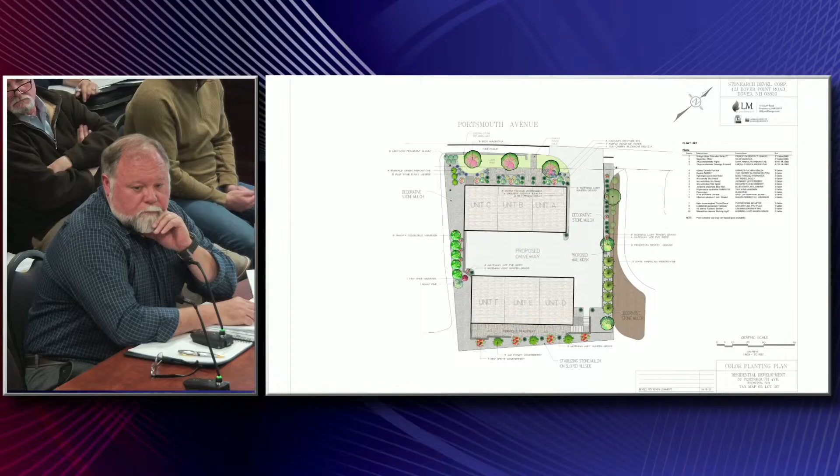There is a door, or at least in the rendering, a door is shown adjacent to that end of the parking stall, near the utility area. So if there's a car parked there, that door becomes unusable to exit from. Does it open in or out? I would assume they open in, most entry doors do. No, they wouldn't open out, because if there's a fire, you need to push a door to go out. The little square feature at the southmost point of the building is the utility room, but the little bump out right beside the steps, yes, that probably does open out, though no one should be coming out of it.

One wouldn't assume so, unless it's during the day and someone's around. So the stairs go around that. I see, yep.

Well, if there's 2 cars parked there, the person who parks the second car, I would assume, is going to leave room for the person to get in or out of their first car. So there should be pedestrian space to walk between the vehicles. I mean, I would assume there's enough space for two vehicles and people to go. And if there's not, they're gonna walk around them and through the hedges. That's just reality, right?

I'd agree there should be enough room to walk, but I'd still like clarification on the door opening out or in. If it opens out, it's a problem, because there's gonna be a car there. Are we looking at the same one? I'm looking at Unit D, the second rendering, page 3 or 4. There's about a 4 foot walkway in front before the parking stall starts.

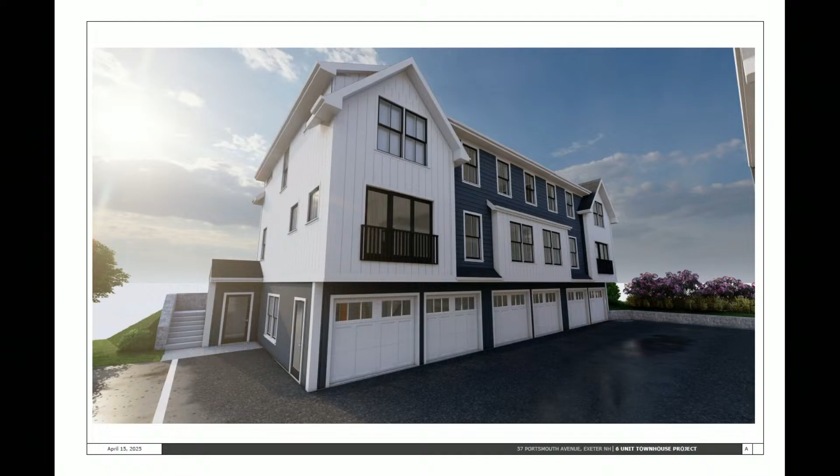Which I don't think is typical, is that? Well, you'll notice all of the other doors, the entry doors to the house, swing in. Yeah, that's my mistake if it does show it opening out. It does, okay, it does show it, I'm looking at it.

It might depend on what's in the room, which you might not be able to open it. The garage, that's where a car could be in the way. Yeah, but if it opens out and there's a car there. Well, yeah, that's not good. The car in the garage could be in the way too. It could be both ways. But they control that, so to me that's different. That door doesn't go into the garage.

Yeah, it does, this little one here goes into the garage. What's the furthest garage door? Wait a minute, what are you looking at? The left-hand side next to the stairs is just the utility. Yeah, does that go into the garage? Does not, that's not what I'm talking about, John. I'm talking about the one that goes into the garage in the corner.

Oh, yeah, that's the only one that matters. The utility one to me is irrelevant, but the one where the car is gonna be parked is the one I think we're talking about. Yeah, I mean, I would just say in, right? Because that way, if it's in the way of their car, it's their car.

And they can always hit their garage door button, exactly, and lock the yawning chasm of that opening. Better to catch it now than a year into someone owning it and being frustrated, right? Absolutely.

So all three garages are open to one another? Or does he? Oh no, I'm talking about just the garage door to get your vehicle in, the door up front that we just talked about. Yeah, well I was talking about the back one. That door, we decided, opens in. This door is depicted currently to open out, that's going to be corrected to open in. What I'm asking is, are those three garages attached, is that one big open space? So one guy gets a door in, the others don't?

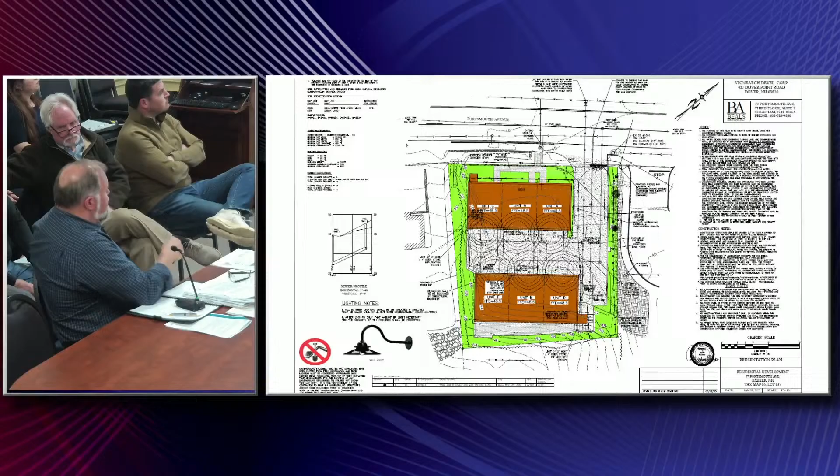So we have this entire area of paved patio, or paver patios. Those are going to be pervious, they do have the filtration below them, they've got the stone reservoir below them, which you can see if you look at the cross-section. Then, of course, which we don't even model in the stormwater plan, these proposed areas are the identical thing, they're going to be pervious as well, so they will take some stormwater from that. But this entire roof, the back end will fall directly into the paver area, and the front will be guttered down and into the stone reservoir, as is pretty typical.

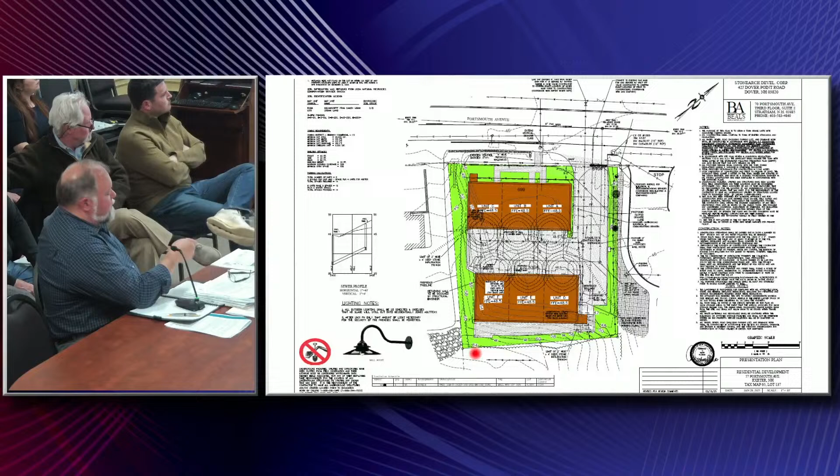Now, the landscape architect is proposing stone mulch for a good deal of the area outside the building, and obviously that stone mulch is going to capture and infiltrate water. But again, we try to run these stormwater models so they are as conservative as possible and basically just contemplate our design BMPs. So that's going to capture an awful lot of water, which is not even accounted for in the stormwater model, because those are absolutely de minimis increases, which I think are allowed based on the letter of your regulation, and will not be noticed. We've reviewed all this with Paul Vlasich as well, the town's engineer, and he said there is absolutely no issue with what we're proposing.

So the stormwater that falls on the roofs that go toward the driveway, and the stormwater that falls on the driveway, where is that treated? That isn't, that's part of the waiver request. So that flows to the street and is caught down by the town's existing catch basin right there.

Basin. And what we've done is, in the larger storms, reduced flow, and in the smaller storms that we have to evaluate based on the regulations, we match that number.

And how are you addressing the concern from Underwood about the hydrostatic pressure behind that wall? Because it seems like you're sending a lot of stormwater to an area behind a retaining wall. It's really not that great a deal of water. I think even in a 50-year storm, to that pond, it's under one CFS.

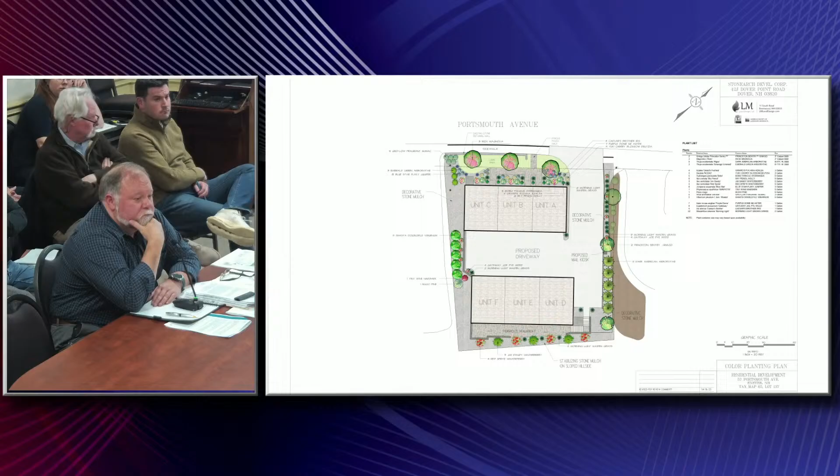Didn't I read this? I'll never find it. It sounded like you had clarified in one of your responses to UEI that this wasn't really a retaining wall in the true sense of the word, because they were afraid it was going to hold the water back, and that in their mind wasn't appropriate. Exactly, that's why we made it integral into the foundation of the building.

And the only retaining wall now is that little angled line right there. So it will just tie into the foundation on the corner of Unit F in the front, run its little angle, then run straight into the corner of Unit C, with a reduction in the wall height as you go down to match the elevation of the foundation of Unit C and tie there. What we had originally, Glenn, was a little stone drip edge that ran the whole length of this building - there was the foundation and then a retaining wall behind it. We have rectified that situation, and in this iteration, they seem to be comfortable with that redesign.

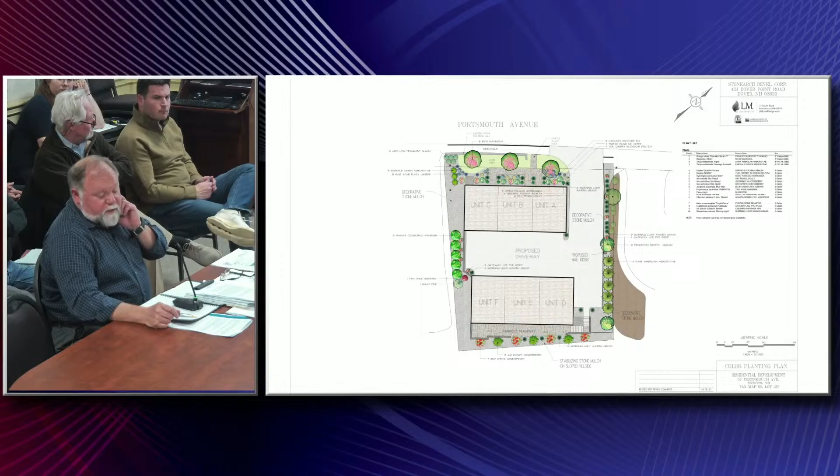Well, it looks like there is a retaining wall behind Unit F, outside of the walkway. What is that? I think that's just a plastic grid with a vertical system to hold the pavers in place so they're not sliding around. Okay, that's not a wall, I think - just an aesthetic feature. Go ahead, Ron.

According to the grading plan, yeah, that's a retaining wall - it's just a 2-foot wall, just a small little landscaping wall essentially.

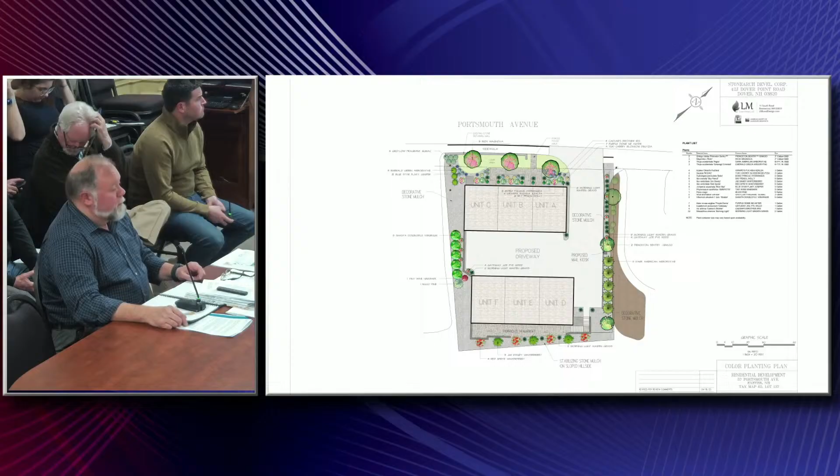Essentially they put a bedding underneath it, they put fabric underneath it, so the rock doesn't start to sink into the soil, weeds don't go through, et cetera. But that will certainly collect and infiltrate some of the runoff.

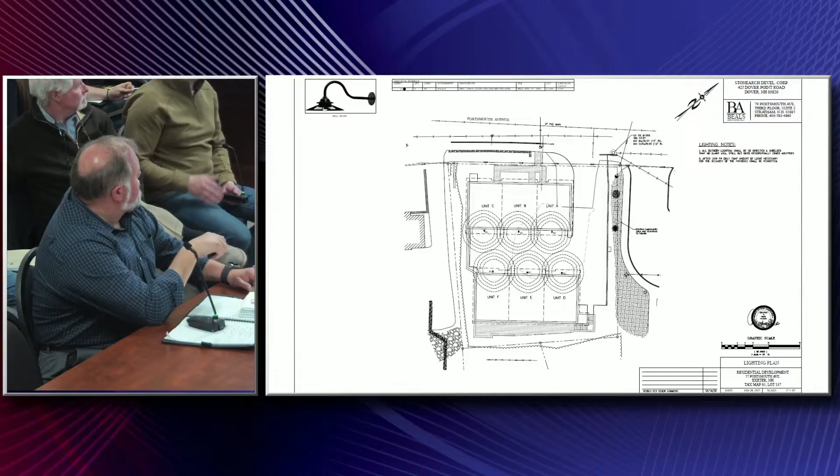Did you include a photometric plan? I don't think I'm seeing one. Yeah, I think there was one in the original. It's part of the presentation plan, he shows the cones of illumination, but he doesn't show anything out front or in the back by the porous pavers either. So those are dark sky compliant.

So that's just the parking lot. What about outside? There's gotta be a little carriage light or something. That's the only lighting that's not just a normal house porch light, 60 watt, whatever it is.

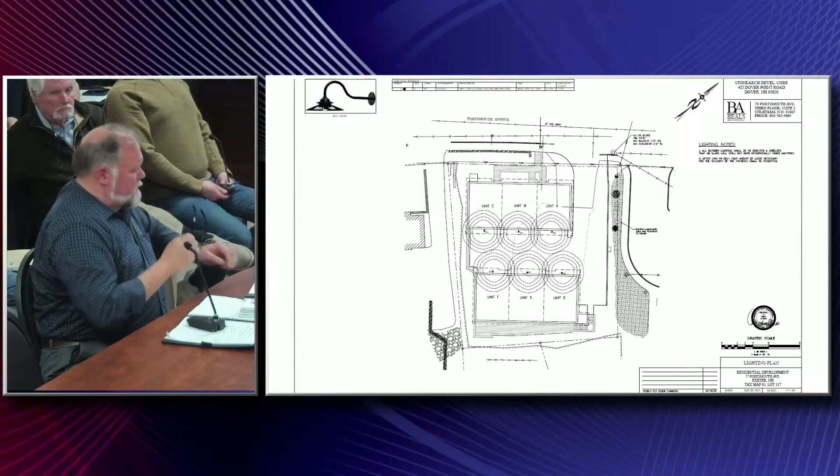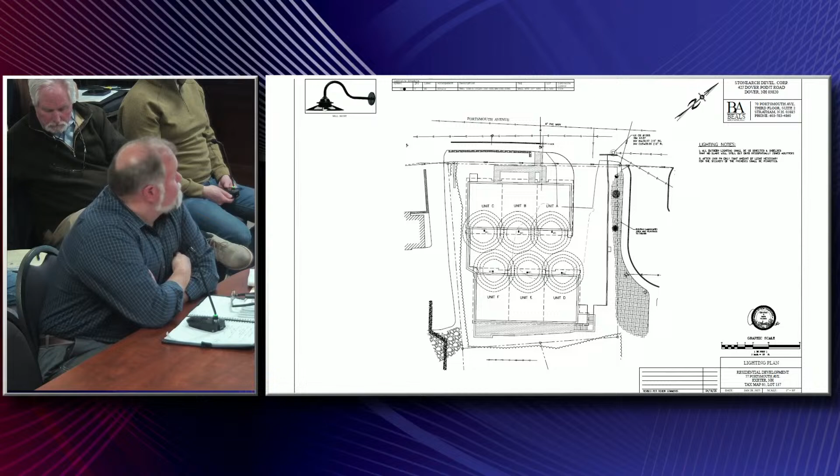And is there a street light right there? There must be one pretty close, on the telephone pole, pretty close. We didn't look up on the sidewalk. Yeah, I think there's one at that corner, on the right end. I feel like there's one right there, at the corner of the property, right between our entrance and the entrance into the Hampton Inn. Yeah, I think it's on the plan right there. Yeah, I think it was on that first one, the court, right there, yep, that's it.

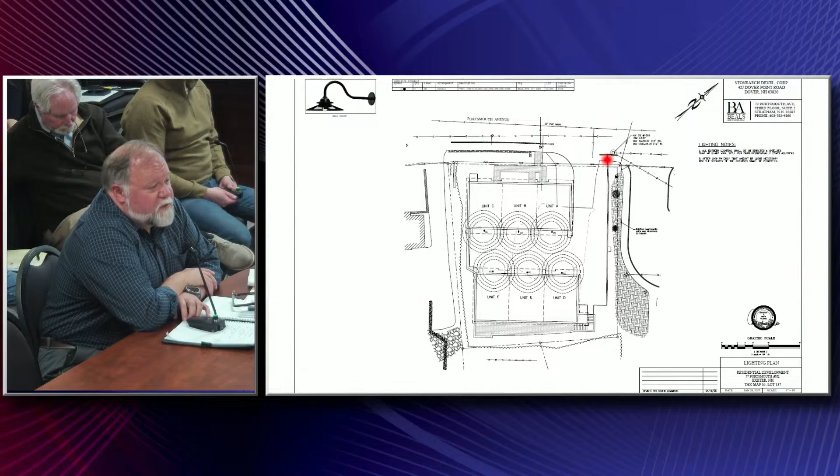So that's throwing a lot of light to the front, so whatever you put in front is probably not going to add anything. I think that's probably why the lighting engineer didn't bother with that.

So the bigger question will be the back, towards the abutters on the other side, and you've got a hill between you and them anyway. Again, those are just going to be little manually operated safety lights for the doorways and entranceways.

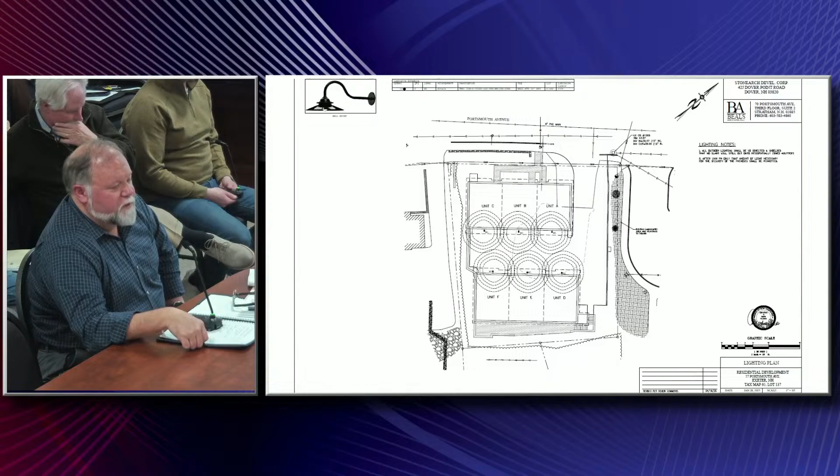I think usually on applications we like to see the photometric plan with anything that's going to cast light on the project, just to make sure it doesn't spill over. I think this came up in the last application too, so it would be nice to see. I understand it's probably not much of an issue here given the surroundings, but it's a good test to do, and it's something I personally like to see.

So have the front door lights and the back lights shown on the plan, all of it. Yeah, and the photometrics, the numbers showing how much light they're casting, because these have rings of illumination, but usually the lighting engineer can just put the actual photometrics on the plan.

I have one non-lighting question. Oh, are you done with lighting? Yes, set with it, thank you.

I'm just curious, if people are coming or exiting the site and they want to go to the left, but they can't because there's traffic there for whatever reason, and this is probably not going to happen often, but they're going to want to get out of their road, and they're going to take a right.

And I did that after the site walk, and I thought, okay, now I've got to go all around the hospital, because that's the first turn you make when you leave. I would go to that light, turn around in the Rite Aid parking lot, go back to that light and take a left. Go through, do a loop, go to Dunkin' Donuts, get a coffee, or go home. That's another option. Yeah, because if I remember right, your last meeting there was discussion of the sign that said right turn only.

What we're proposing and have in front of you today is the mid stages of this plan design, I'll say. This includes the relocation of Building D to what is the top right-hand corner of the plan as shown on the screen. This plan uses a 24-foot access road stemming off the end of Ray Farm Road as it exists today. It connects to the existing drainage that's there that the town currently has an easement over, and then continues up and proposes additional drainage and stormwater management.

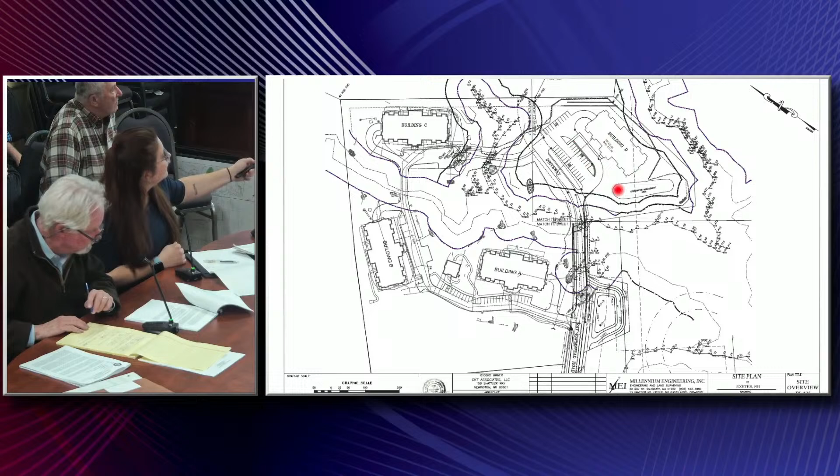Then it provides 72 parking spaces, half of which are underneath the building and the other half that are in this parking lot. This is new to this site design, and we feel that's a little bit better than the last. This also provides a continuous turnaround for any type of fire apparatus reaching into this site, whether it's for medical or fire purposes. We've also connected this new building into the existing development with a walking path.

When we sat with TRC, there were a multitude of things we need to address, and we understand we need to address some detailing on the plans, some differences in colors. The plans we originally submitted, I'm not sure if they're in color in front of you or not, were in black and white, which makes it very difficult to read the wetlands buffers. We're also in the process of getting everything together so we can submit for our conditional use permits, but what we wanted to approach the board with today is to see configuration-wise and some of these initial aesthetics of the plan, what the board's general feeling is of this project as it sits.

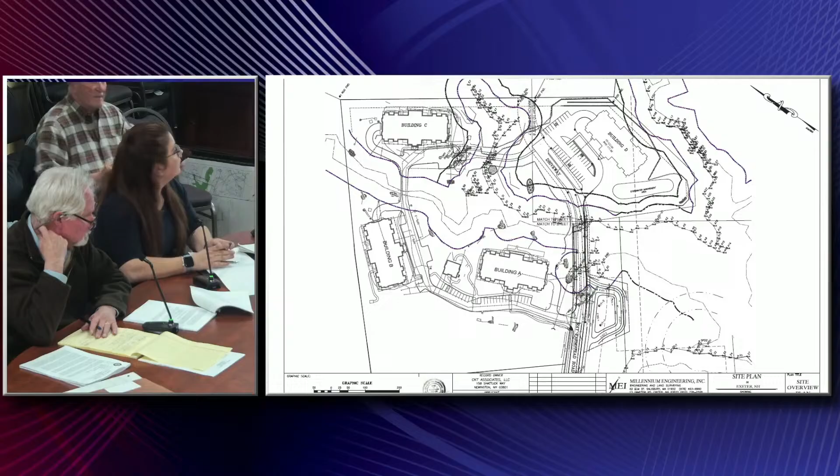Is that it? You want to open it up to the public? I could do that, yep. I can open this to the public. Anybody in the public who would like to speak, feel free to raise your hand and speak into a microphone.

My name is Marty Kennedy. I live at 7 Wiley Creek Road, at Building A on the map there. I'm also a member of the Condo Association Board.

I'm not necessarily representing the board. However, we, the board members, have talked about the concerns we might have. We've also had meetings of the various residents and discussions of that. Depending on where you go with this, in future meetings there may be additional people, residents, who will want to come. But I wanted to come to just give you a sense of what discussions are happening at Ray Farms.

I would say that in general, the residents are not necessarily opposed to the project, but we have significant concerns. And actually the applicant has met with the board and has offered to work with us, and those types of discussions are ongoing, but we don't know where they're going to go at this point. But I wanted to at least raise, since this is a conceptual discussion, at least two substantial concerns that we have, so that you're aware of those.

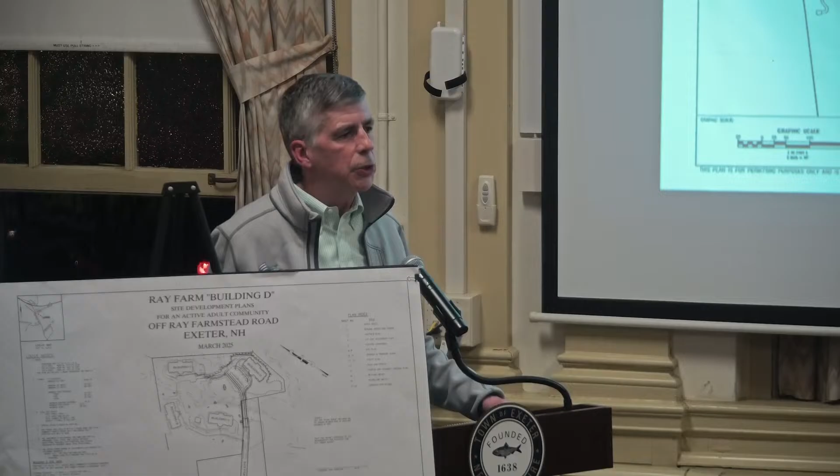The second issue is we have serious concerns with—it's not on the map here, but out on Epping Road—any pedestrians trying to get across Epping Road, it is a dangerous situation. Epping Road today, in that section, has some 12,000 vehicles per day. During the afternoon peak hours, like 1,500 in that segment. That's a car going by every 3 seconds or so. During the busy times of the day, it is impossible for a pedestrian to cross there.

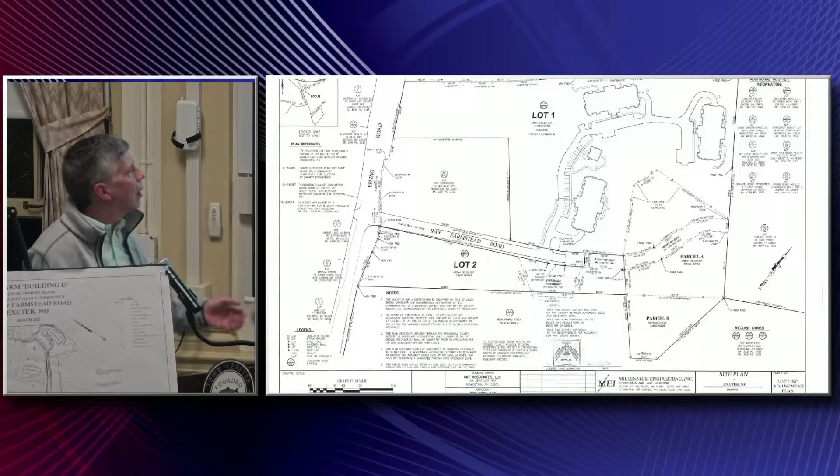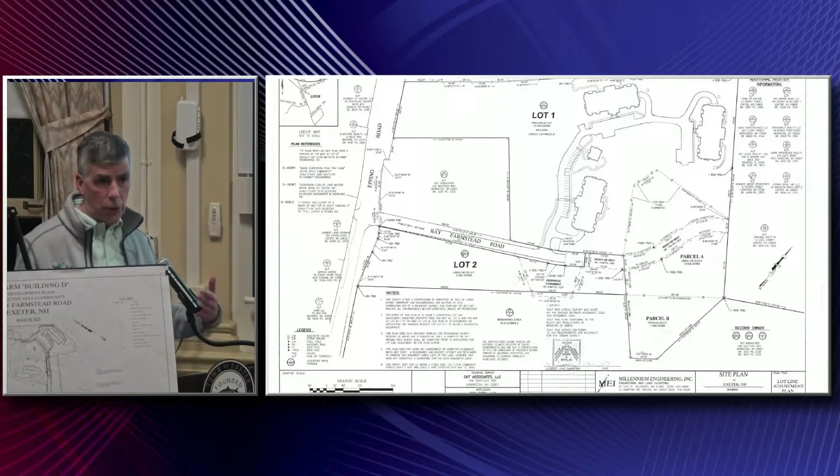This section of Epping Road, we're now bringing residential into this area. So if this fourth building is approved and built out, we'd have 128 units in Ray Farm. And across the street, of course, you have the Gateway Development Project, which has another 224 units. So we're talking about over 350 residential units right here in the segment. To the back of where we are, we have a wooded area, there's bike trails and hiking activities, and a lot of pedestrian movement out here. What's ultimately needed is some type of signalized control that allows pedestrians to get across Epping Road, and that's a concern of ours.

I know it's early, but at this point, we may have other concerns, but those are probably the two biggest concerns we have at this point. Thank you.

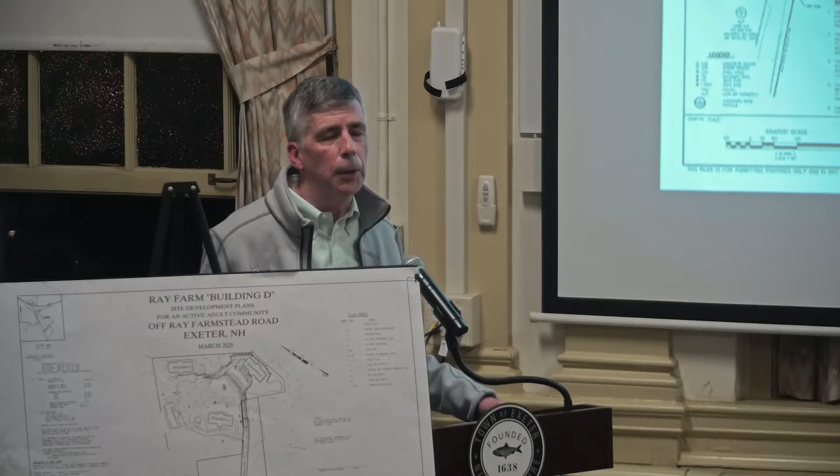Yes, sir. Quick comment.

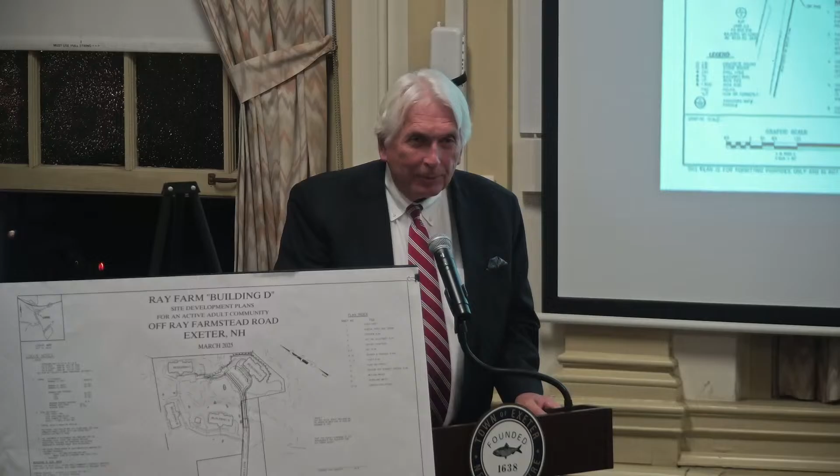My name is Russ Hilliard, and I'm with the firm of Upton and Hatfield. I represent Scott Carlisle, and I rise just to reiterate what I've said to the board a number of times over the last 3 years. We have never objected to the relocation of the building. We just want to be sure that whatever happens doesn't interfere with Mr. Carlisle's right-of-way that leads to his property. That's all I wanted to say.

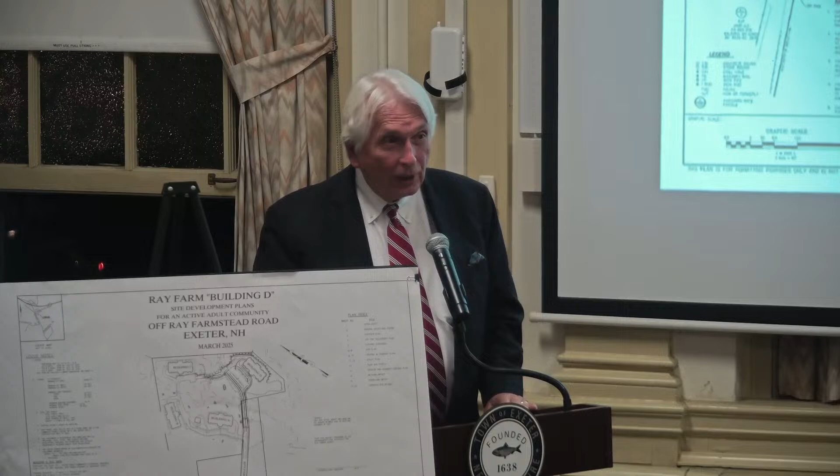Thank you very much. Thank you. Anyone else?

Does the board have any other questions at this point? I don't.

I think, Mr. Chairman, the only thing—and you've already stated that this is something you're addressing—but the plans are hard to read, and there are a lot of things that are missing. I can't tell what the buffers are, and I don't see anything about the shoreland protection area and how that affects this site. So that just needs to be fine-tuned. I know you've already said that's what you're working on, but...

I concur with that. Thank you. That's why we didn't come forward tonight with a formal hearing, because it wasn't going to go anywhere. Right, and the fact that you haven't really asked many questions here tells me that was probably smart. I do have one closing remark to make if the board has no other comments about the project itself.